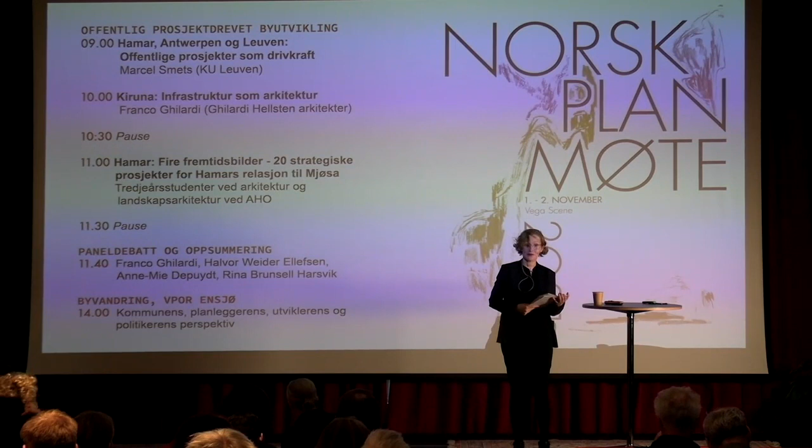I'll take this in English. We are so lucky to have Marcel Smets here. Marcel was the chief developer of the widely published and highly praised transformation of the area around Leuven station in Belgium, and also the Antwerp station.

Smets is professor emeritus at the Catholic University of Leuven, and he is also a visiting professor at the University of Thessaloniki and at Harvard University. This fall, Smets has collaborated with the Institute of Urbanism and Landscape, discussing infrastructure and the urban project as an instrument of transforming the city, with the third-year students of Architecture and Landscape Architecture working on Hamar.

The students will present this work during the planning meeting later today in a short brief, and in an exhibition in Hamar at B-Lab, opening the 10th of December, where the lectures Smets has been involved with during the fall will also be exhibited.

So today we will talk about the urban project, where the project is used as an instrument or a means to transform the city without going outside its own limits. I would like to say welcome to Marcel. We are very happy to have you here. Marcel was here last week discussing projects with the students, and we're very happy to have him with us today. Thank you, Marcel.

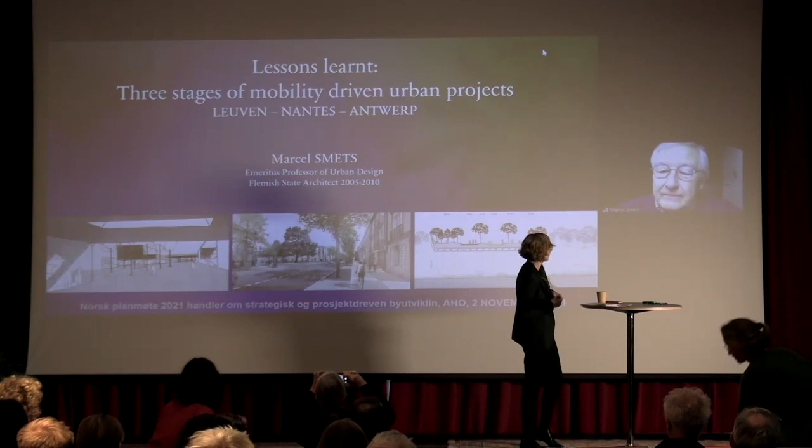Thank you very much. Can you hear me? Loud and clear. Okay, perfect. Thank you very much, Maria.

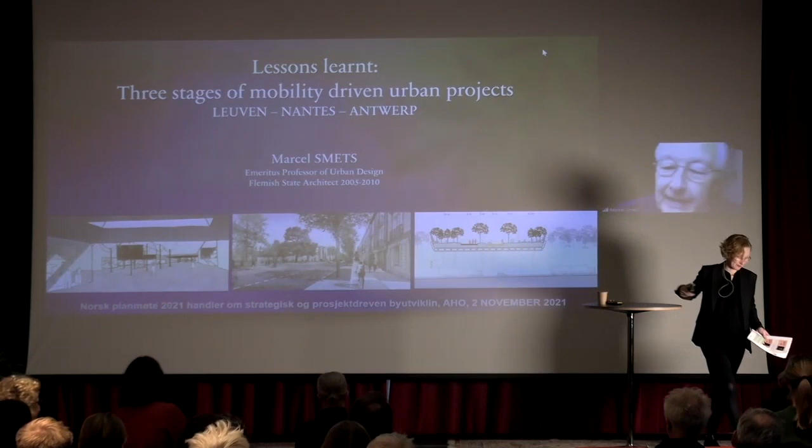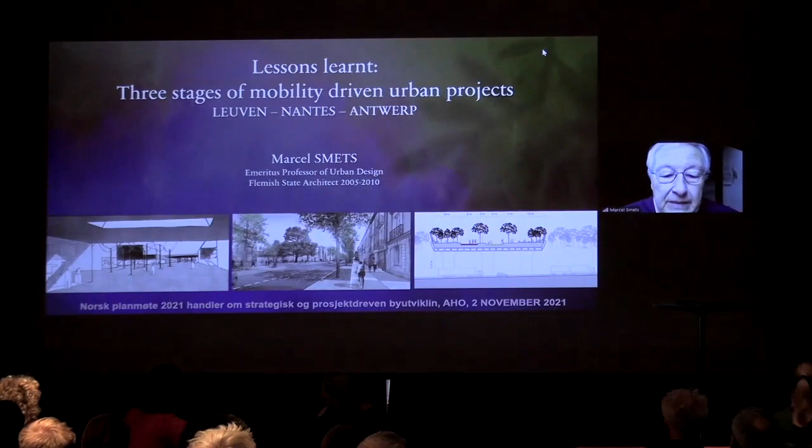Good morning, everybody. I'm very sorry not to be among you, but these means today allow a proximity which was not possible earlier. So I would like to entertain you this morning about three meaningful projects in my life.

They are meaningful not only because they actually cover the better part of my life. The Leuven project goes back to almost 30 years ago, the Nantes project like 10 years ago, and the Antwerp project, with which I want to end, is very recent.

It's 2020. So, they are not only meaningful because they give a sort of an image of what I've been trying to do in different associations designing and coaching these projects.

But I selected these three because they are not just projects. These three projects have all been, or are on the way of being, implemented. So I want to make a point for the feasibility of the urban project as a means of designing and directing infrastructural design.

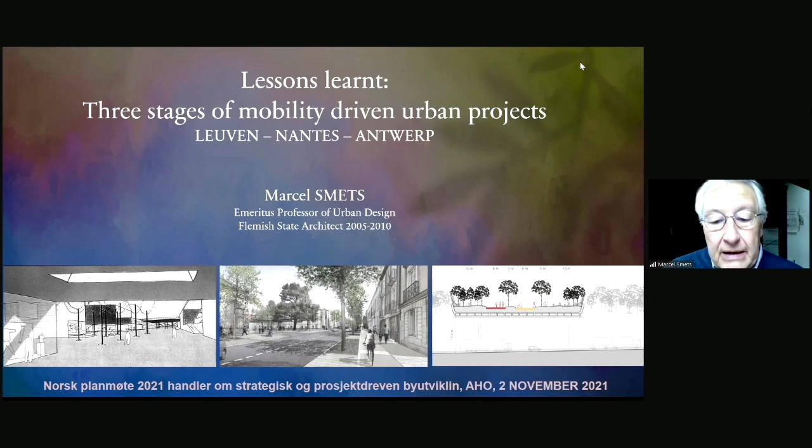So the intention of this lecture is to use these three successful case studies to investigate their recurring points of methodology, and state these points of methodology as a potential set of requirements and strategies to approach the urban project in general.

I would like to start now with what normally would be more or less the conclusions of a lecture, and put forward four steps or four conditions which, looking back at these three projects, I think are rather essential to have the success they were able to obtain.

The first requirement is that you would formulate a strong overall spatial concept that addresses both the general and the specific conditions of the site. It is not just generic, these concepts are specific, they are contextual. And not only contextual on a smaller scale, but also on the scale of the city itself.

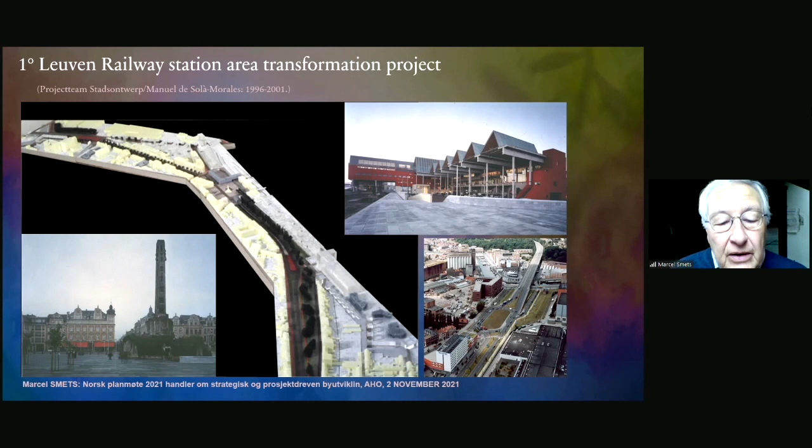Let's start with the Leuven project, which goes back to the period 96-2001, at least for the executive and implementation part. It deals with infrastructure, situated around the station of Leuven, which you see here on the model, and covers quite an area, reformulating the infrastructure in the proximity.

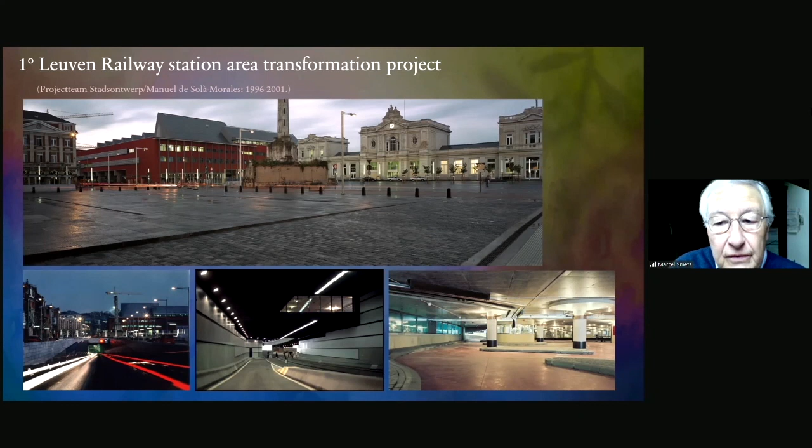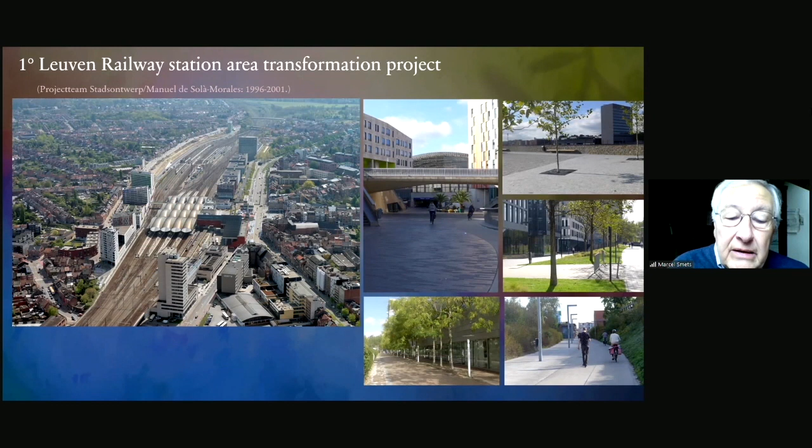It deals with the public space just as well as with hard infrastructural space, a tunnel, a parking, and so forth. This is a very recent aerial photograph where you see that the project, after 20 years, is more or less finished.

It started out with an analysis, which made clear that the line of the railway was like a tangent to the more or less circular city, and that in between the one and the other there was a large zone of city and infrastructural amenities, largely outworn and ready to be changed.

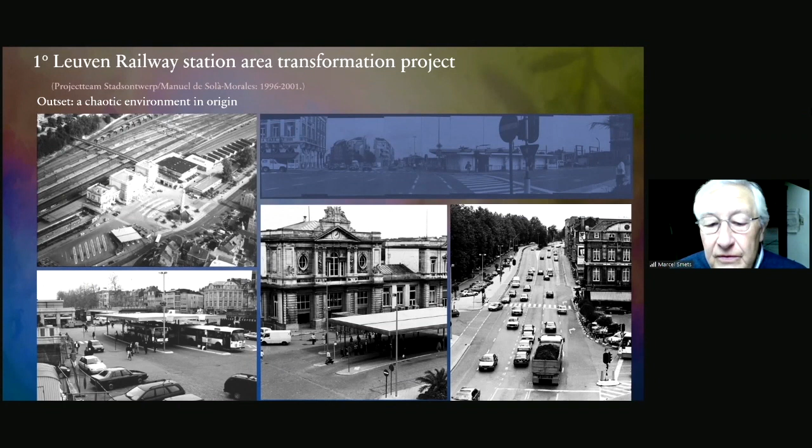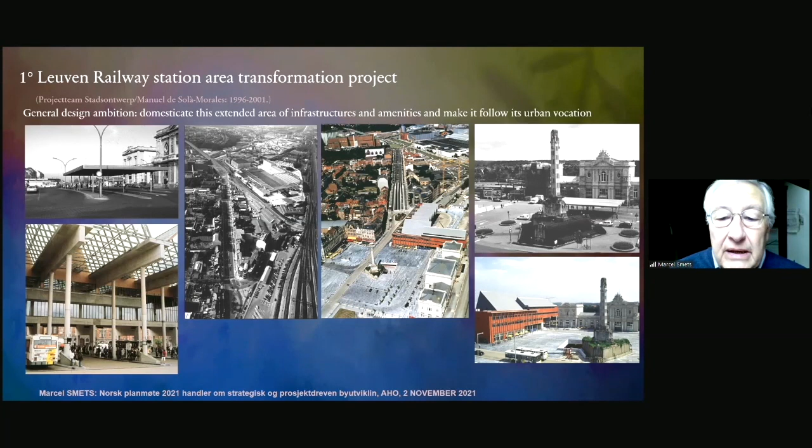So the general design ambition was to domesticate this extended area of infrastructure and make it follow its urban vocations. That's why I like to use these before and after pictures from the same angle, to see how much this project has actually changed the setting.

With relation to the spatial concept, there are a few major ideas. The first is to blend the transition between the center and the outskirts of the city by transforming the rail station into a hub of collective transport, liberated from the transiting car traffic.

It's an objective at the scale of the city region, where the line, in a hilly landscape, passes through the city and gives way to a place where the outskirts and the historic city touch each other. That's where we want to make the liaison.

To do that, we had to relieve this area from car traffic by directing the main flows around it. This was done by using the triangular traffic node that existed prior and condensing it into a real traffic plaza, which gave way to one road coming from the outskirts and passing along the station, liberating the zone separating the historic city from the railway station.

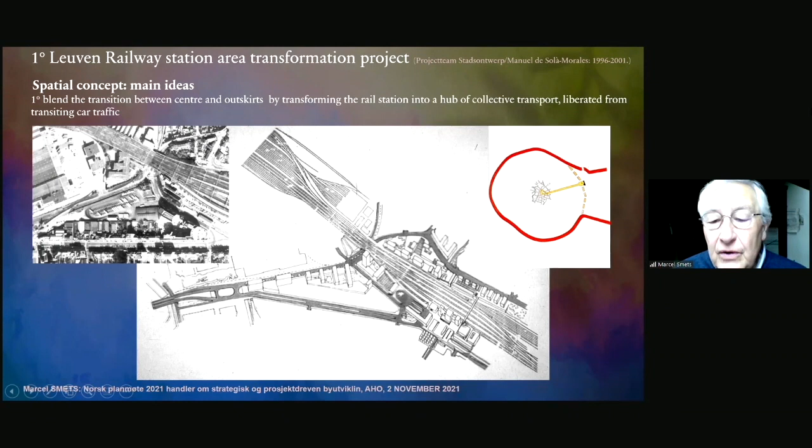That is the first element. The other element of the junction is the fact that you have to bring pedestrians and cyclists from one to the other. This is a main task, because it means we have to find a way of bringing people under the tracks and then back to the city, changing this passageway into a real urban street.

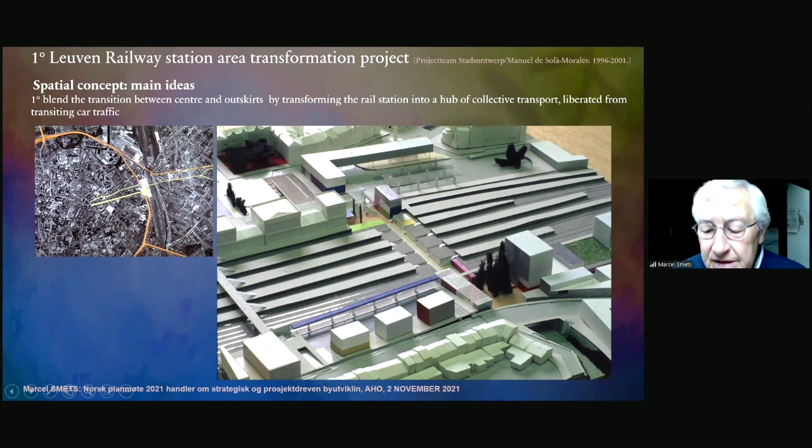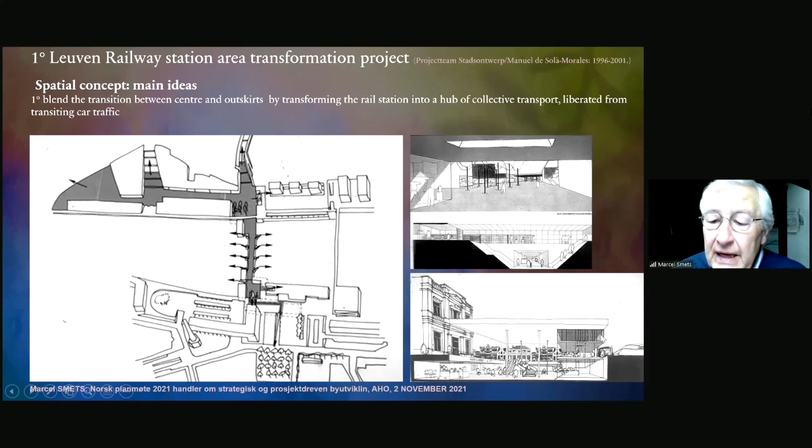An urban street which would, of course, need the necessary light - that was the idea of the original concept - the necessary ampleness, and the idea of introduction into the city.

The second main element of the concept was that there is an obvious linear directionality imposed by the tracks. Rather than denying it, the idea was to use it as a strengthening general concept, placing the major attractors of public activity on both ends of this linear development stretch, which would allow the intermediate space to develop relatively easily, since there would already be a passage from the station through the attractors.

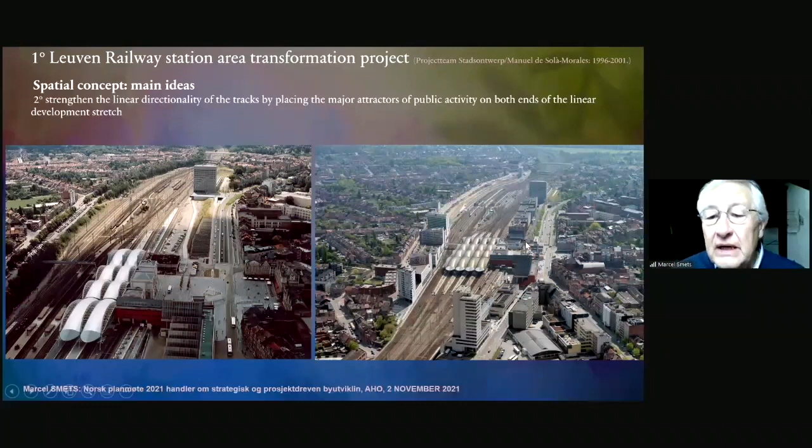As you see, these are two aerial photographs, one from 2002 I think, and one more recent. You can see that this idea of the attractors, which led to the filling afterwards, has been implemented.

The third important idea was to differentiate the particular character of the central city and the suburban urbanity, by creating a complementary opposition between the development on either side of the tracks. In this early model from 1994, 95...

...you can really see that we already foresaw a sort of park vis-a-vis the developed side here, on the old merchandise area of the railways. This opposition, but also this contact and complementarity, was of course not only important for the project as a whole, but for preserving the aspect of both city and suburb.

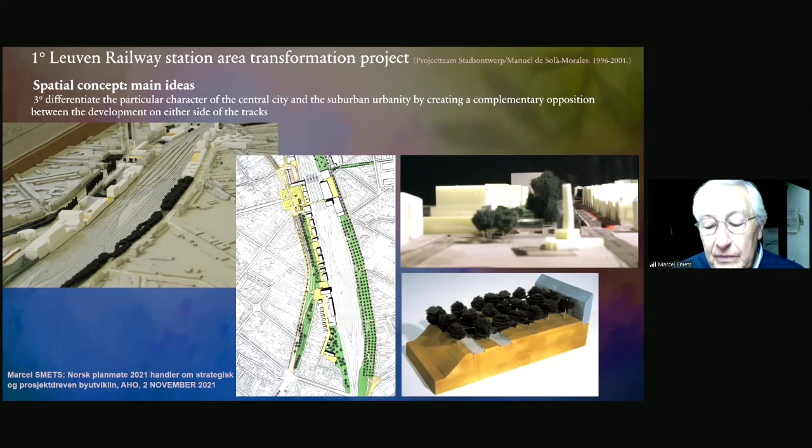And also here, we see that today we have this development, and we have been able to keep open the park, which I will come back to, has been realized in the meantime.

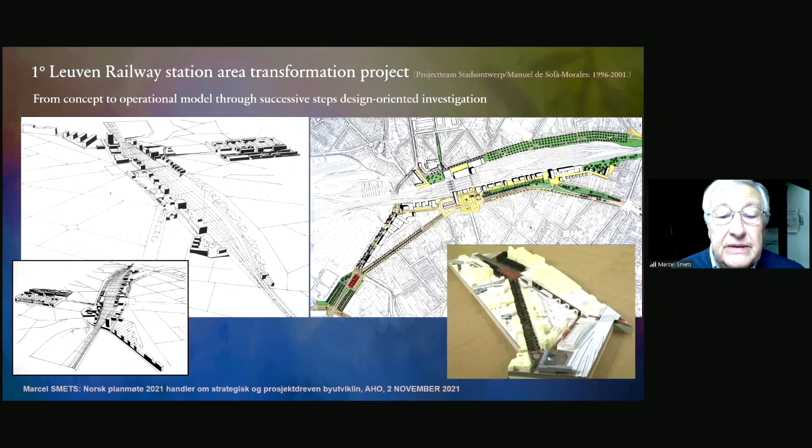From these original thoughts, we have to evolve to what I call an operational model through successive steps of design-oriented investigation, research by design, some call it. The idea is, of course, to test, and by testing, always make a step further from one project to the other, and get to a closer definition and a closer acceptance by all parties. And then, of course, there is this whole idea of securing the agreement of the major stakeholders by making them part of the design process.

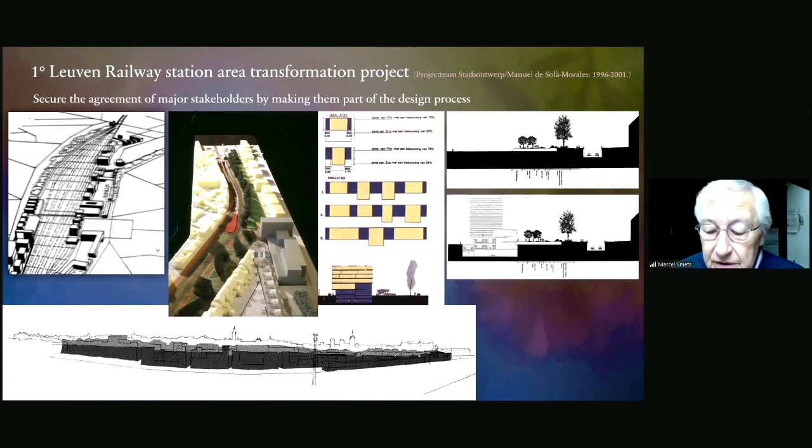I don't have time to go into it, but this project would have never been possible if we had not met, over a period of 2 years, every month with the high chief officials of the railways, of the city, of the Ministry of Public Works, of the bus company, each time proposing new schemes, new models, trying to test how they were reacting, reworking it, and so on, in order to finally arrive not at a definite plan, but at a framework which still left the possibilities of interpretation and change of program as time went along. 20 years is a very long time for execution of an urban project, and one can never foresee at the beginning what will happen.

Now, all of these at the time, we were either directly connected to the implementation, or we were able to monitor it very closely through friends and other architects. For instance, this whole idea of the transformation of the infrastructure - actually the team of the university I was directing at the time got a direct commission, in association with TVK, which was the engineering office, to actually implement it.

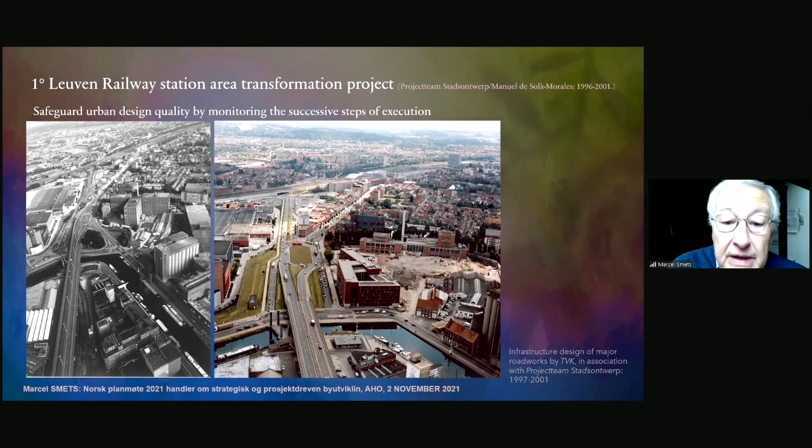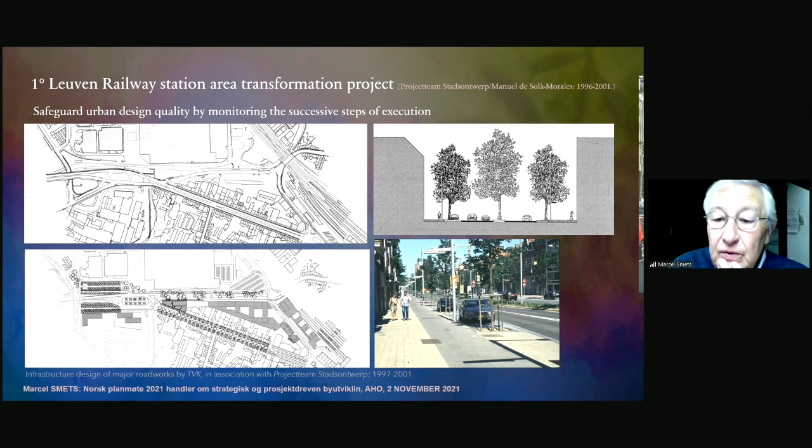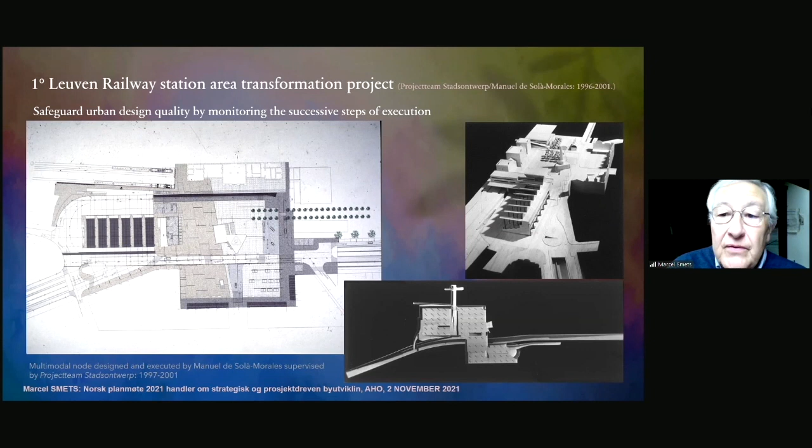And so this whole reworking of the sections, of the plantations, of the lighting, we actually did ourselves. And then, of course, there was this fantastic situation whereby I was able to ask Manuel de Sola Morales to collaborate with us - he being the executive architect, I the overlooking urbanist - whereby the project itself for the multimodal hub was actually designed by him.

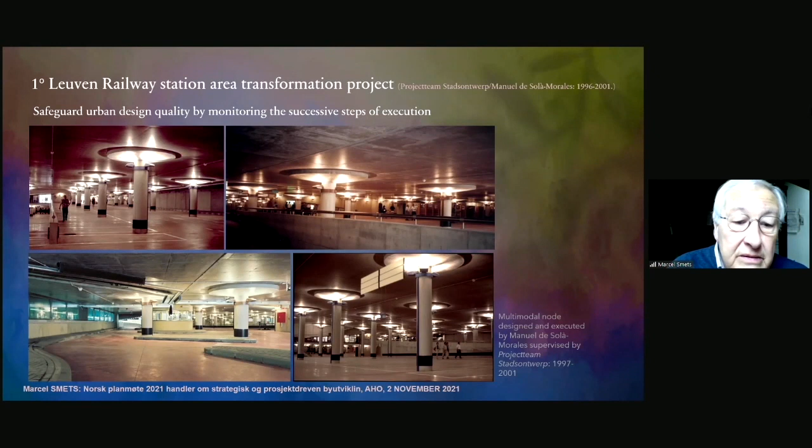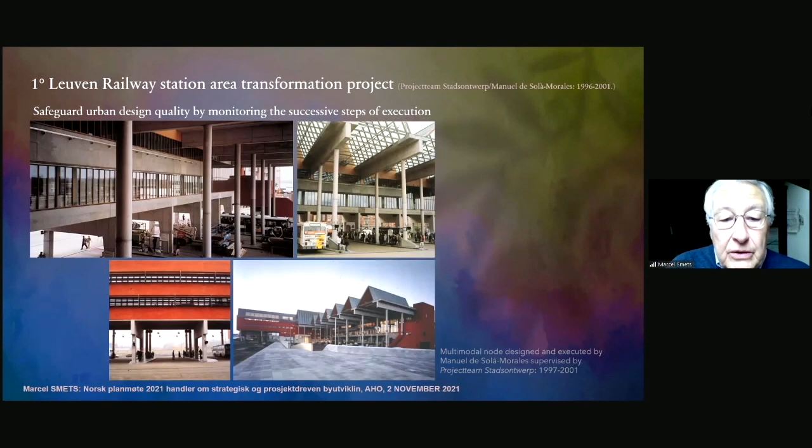It would take us too far to go into this description, but I hope the photographs speak for themselves. What I want to accentuate here is the fact that this would never have been able to happen if we had not had a direct line with the client, the public client at the time, which was the city, the 4 public partners who were actually paying for the project. So this part of the multimodal hub, for those who don't know the project, has many sides and many aspects, and is extremely well designed in its complexity.

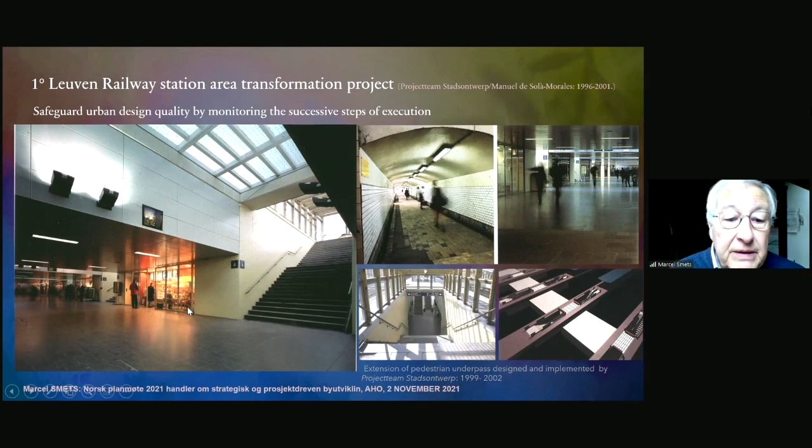There were parts that were more or less forgotten in the agreement we made between parties, and one of them was this underpassage under the tracks, which was essential though for the project. The railway company had its own engineering office, and they insisted that they would do this. Well, happily, they had a very inexperienced young engineer on it who was only too keen that we would be of assistance. And through that, we were able to more or less design, as a sort of second-hand help, the change of what you see - a very, very narrow underpass - into what I think has become a rather successful street.

I want to finish with two examples showing how important it is to keep on with this kind of monitoring in the long term. One is an example where this was not the case.

I left the project myself in 2002. The city sort of took over, with some of my earlier collaborators serving as advisors.

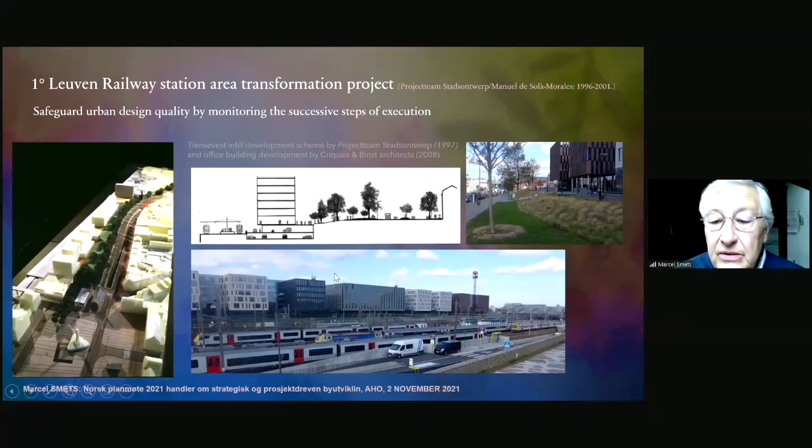I'm not so happy with the way this infill was realized. It was much too dense compared to what we had foreseen. There was absolutely not enough transparency. It became much more of a wall between the city and the site. So this is where we lost the battle of not monitoring.

The other side, however, is extremely successful in my opinion, by some coincidence. I was Flemish state architect when the new competition was launched, and I was able to contribute to having a very nice design selected by H+N+S and Archineering.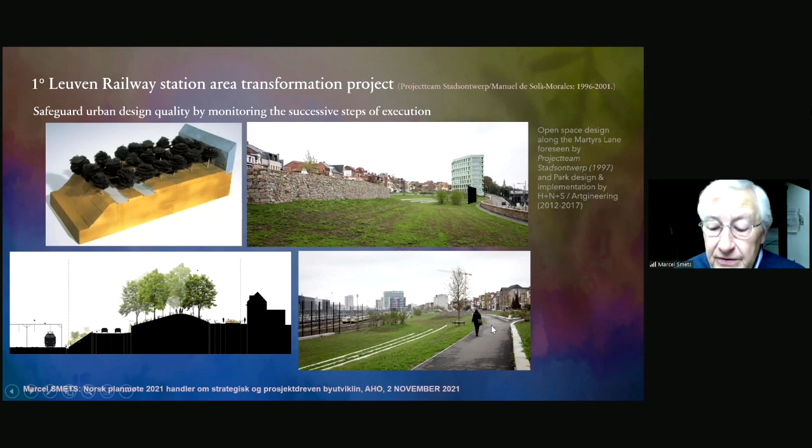I think the project they made was better than the one we originally foresaw, a parkway, which you see on the left at the top. Underneath, you see the new section where the road was actually dug in, which created this elevation whereby the passing road is practically absent, and the tracks themselves become part of the overruling landscape.

So that's for the Leuven project. The second one, the Ile de Nantes—it's a nice coincidence that Annemie explained the whole project yesterday, so I don't want to go back into it, just resume with an infrastructure plan, improved accessibility, and the development that came as part of it.

On the right you already see a picture of this new chronobus, bus line number 5, C5, now running in Nantes in an east-west direction, which has also allowed the transformation of one of the main east-west axes with the creation of a lot of public areas.

In general, the whole idea of the Ile de Nantes has to do with the transformation of an initial industrial land that was basically determined by a north-south transit into what was called a metacentre, which really extended the original centre-ville, the center of the town.

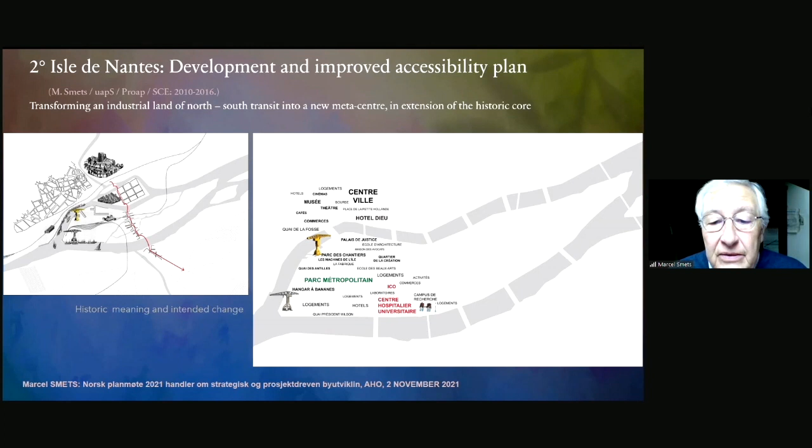This would combine many new facilities, activities, and large institutions, which needed a great sense of centrality without killing the central city, because they stayed complementary.

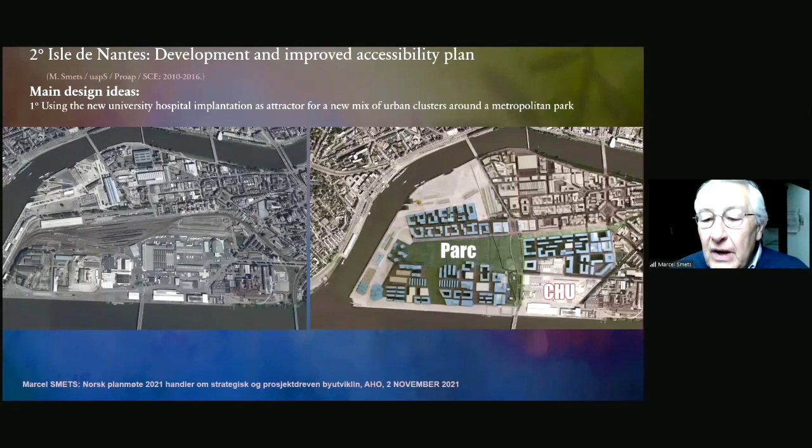There were a few main design ideas, one of the first being using the new university hospital as an attractor for a new urban mix of urban clusters around the metropolitan park. This introduction of two large new elements mobilized both a number of activities—the university center—and open air attributions.

This is very essential. The other idea is that the north-south throughways, which divided up the island, would be changed by inserting them into a grid of local main roads instead of throughways, for service and distribution—adding the east-west connection and lowering the intensity and capacity of the whole thing.

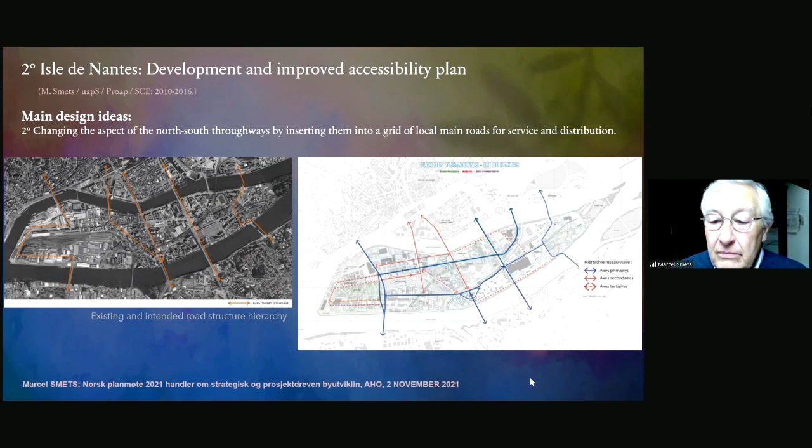With regard to that, an important element I want to stress is this new junction, the introduction of a new passage between the two existing bridges.

The view we proposed with Annemie was to have a parkway connecting it, an assemblage of new functions as one element, but also marking two different atmospheres, two different urban landscapes: one, the more built landscape of the metacentre and the hospital, and the other, the open park landscape with buildings in it, at the point of the island in the Finistere.

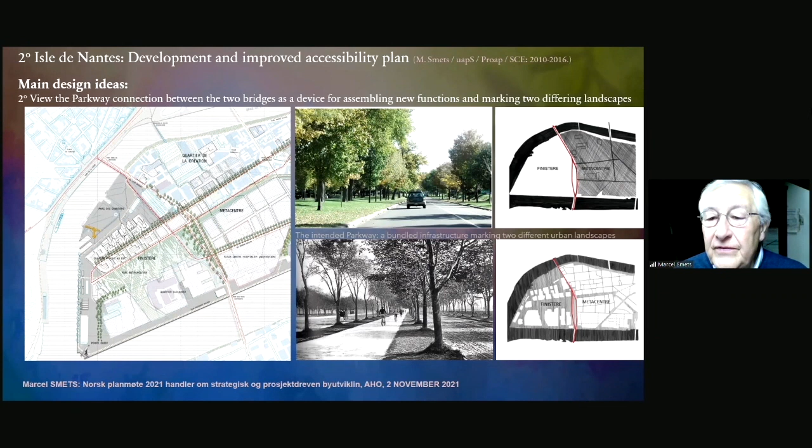In order to realize this metacentre and this new urban ambience, you can only get to this kind of centrality if you realize accessibility from the whole region. And if it's not to be by car, it needed a great impetus in public transport.

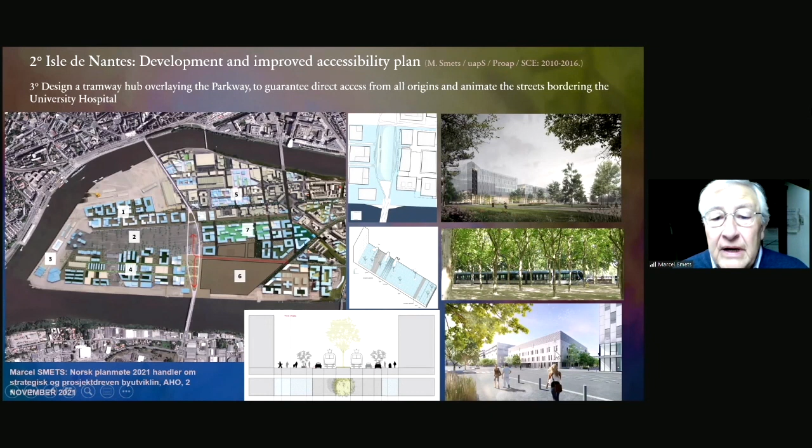I'm showing these designs that UAPS has worked on most of the time, to show this idea of a plaza, an open air plaza in front of the hospital, which you see on the top right, and also the section of the new road along the hospital, which because of the new tramway had to breathe another atmosphere that had to be decided and worked out.

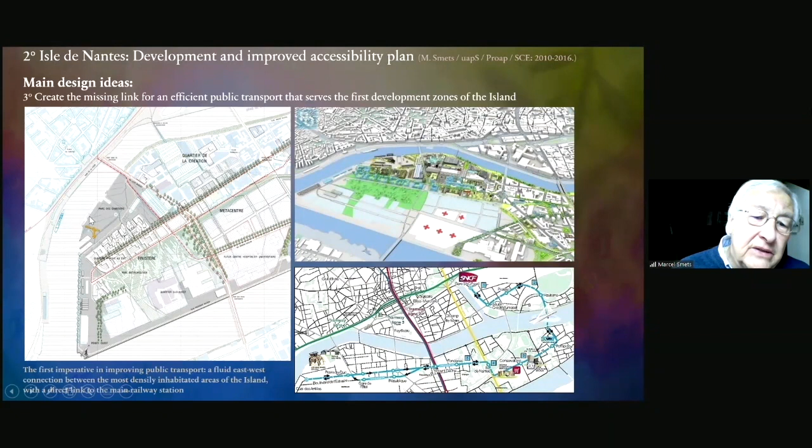Now because the building of the hospital and all that takes years and years, the first priority of course went to giving access and improving accessibility by public transport of those areas which were already built, basically in the north of the island. As you see in the Plan de Transformation, this quartier de Prairie-au-Duc has 3,000 inhabitants.

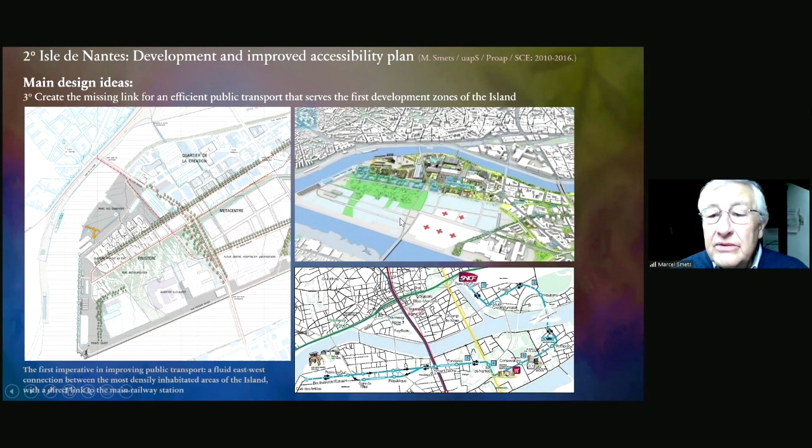I'm including a plan which we didn't draw, just a plan of the Ligne 5 as it exists today, to show how this line links all these subsequent elements to the station, and also realizes an east-west possibility by taking this super fast bus line.

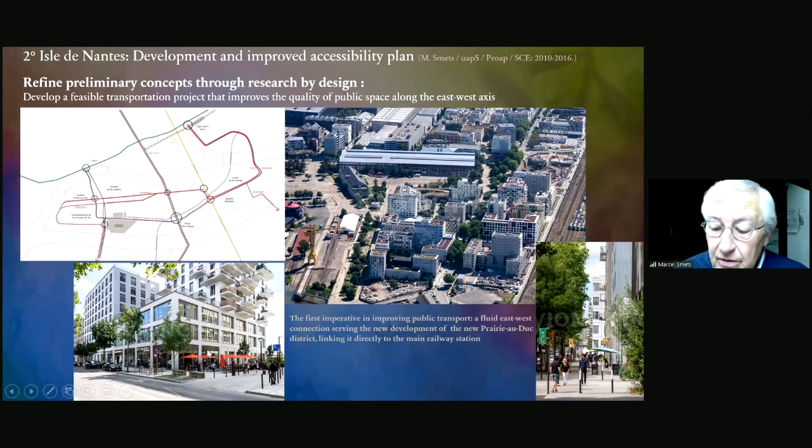Then, in the middle, this axis is actually the bus road, but it's not only the free bus road, it's really the central spine of the new area, with a number of corner shops and so forth, offices, etc.

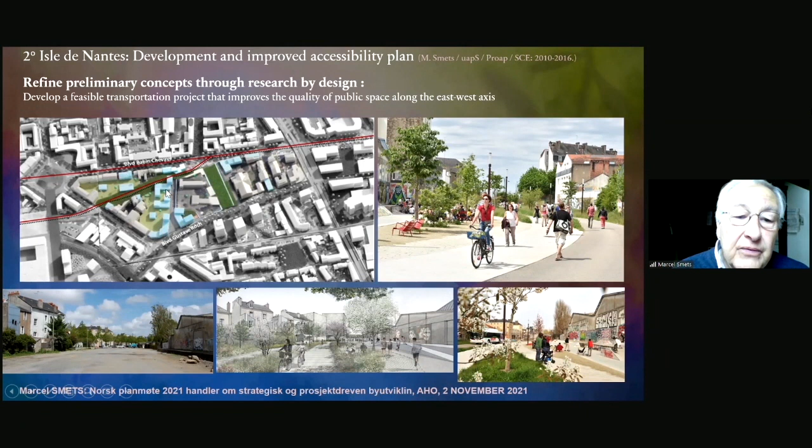A little further, in the existing area, which is really the older, somewhat poorer area that's still there, what we were able to benefit from is this kind of derelict space that existed because the train was also ancient, going through them. Instead of just filling it, the idea was to keep it, use it both for the bus and for the bikes, and as a sort of very rudimentary public space, which with very little means would at least start the transformation of this poorer area. The blue volumes are all part of proposed transformations in this area.

And finally, maybe the more important one is this so-called Boulevard Vincent Gache, where the very great specificity was the existence of this sort of 20 meters wide former railway emplacement, which was only used for wild parking at the time, even though there had already been quite some renovations, some new buildings at the time.

What we suggested together with ProAP and UAPS was the idea of using this 20 meters of wild parking as an initiation to create some kind of zone, let's call it a green corridor, planted, but not only planted, a real civic use, and use the necessity of having the bus line go through there to transform the whole transversal section. Again, this idea needed a lot of elaboration.

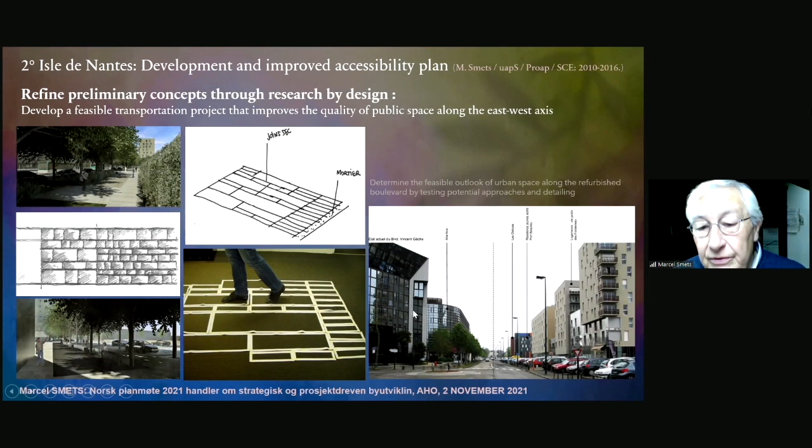It's not only a concept, it's how do you go from this concept, this original picture as you see, to the actual situation. It both enhances a view of the kind of landscape you want to incorporate, but also a view of the detailing that was originally foreseen by João Nunes, but then really worked out in detail later by Annemie and UAPS and her group, in order to come to a result which you basically see here.

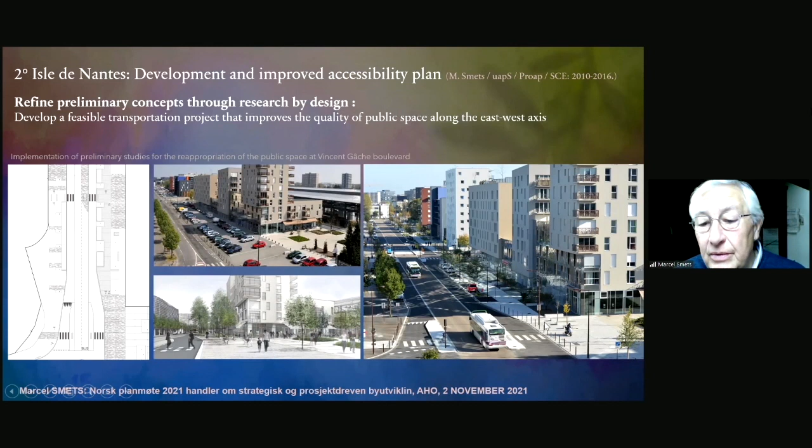As of a whole transformed section, whereby indeed these wild parking spaces were sacrificed in order to bring the possibility of a new public use and a new urban landscape, all thanks to these separate bus lanes in the middle that we needed in order to guarantee the accessibility.

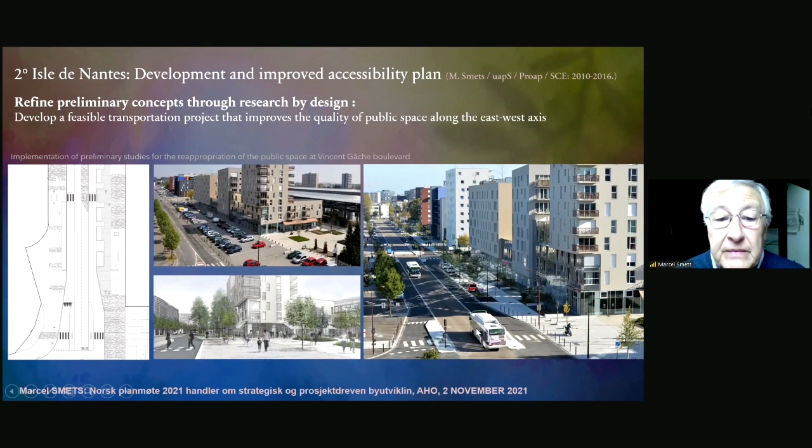Now, of course, this would not have been possible, as was already very highly stressed yesterday by Annemie, without reaching the mandatory agreement of all stakeholders through intensive processes of co-creation. I don't want to say more, but I cannot stress enough this necessity.

I'd like to end with this: the nice thing is, of course, that there is a magnificent reaction both of the citizens, but also of the market, in creating new developments in response to the reviewed accessibility and to the public space that is available there.

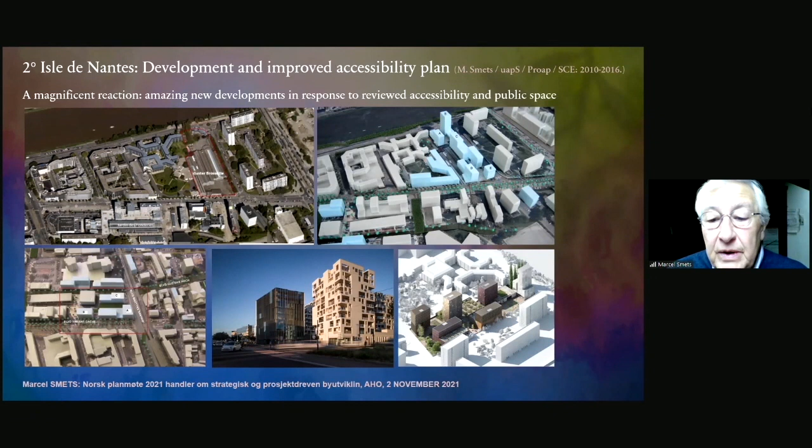Both of these areas have in the meantime been developed after plans for which we made the feasibility studies, and so forth. We have no time to go into it, but the nice thing is that, in my view, these reactions of the market, seeing new opportunities because of the improved accessibility and the enhanced quality of the public space, are rather exceptional.

Finally, the last project I'd like to go into is one I've been able to monitor within the group I'm actually working for quite often now, for Urbanism, which we undertook together with the Engineering Office of Tractebel and the Communication Office of Common Ground.

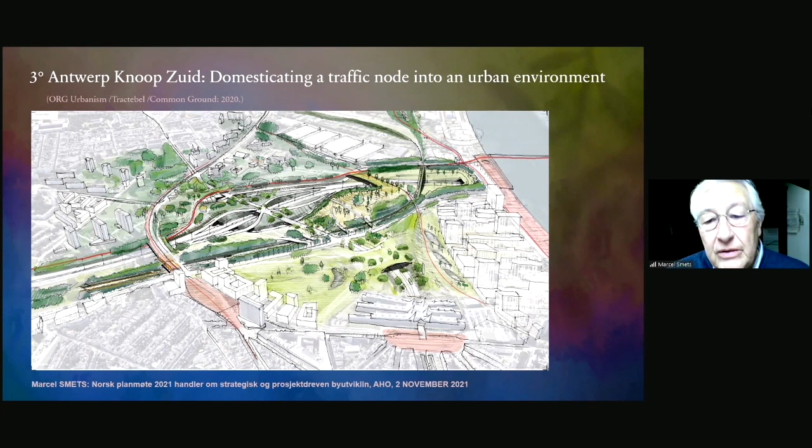Now this, in contrast to the two first projects, in a way looks like it's more an open project, more a landscape project, like it's not part of the city, and yet it very much is.

What we are dealing with is this enormous urban node at the south of Antwerp, part of the earlier motorway, which was conceived solely as a highway, a motorway network, motorway spaghetti and solutions, and all the problems that stem from them have to do with this attitude.

Because you see, not only the size—we are talking about 1 kilometer by 1.2 kilometers as a gap, an opening between the city center and its peripheral development—so it's a huge barrier. And at the same time, of course, it causes a lot of problems with relation to air pollution and so on.

So the city was not happy with it for years, and had been working on how to amend this situation: how can we fill in the edges of this open air area with different kinds of ideas and projects, and how can we re-establish certain links between the city and the outskirts, and on the other hand, how can we transform the capacity, the idea, the quality of this open space, and make it usable for the city instead of just being inaccessible?

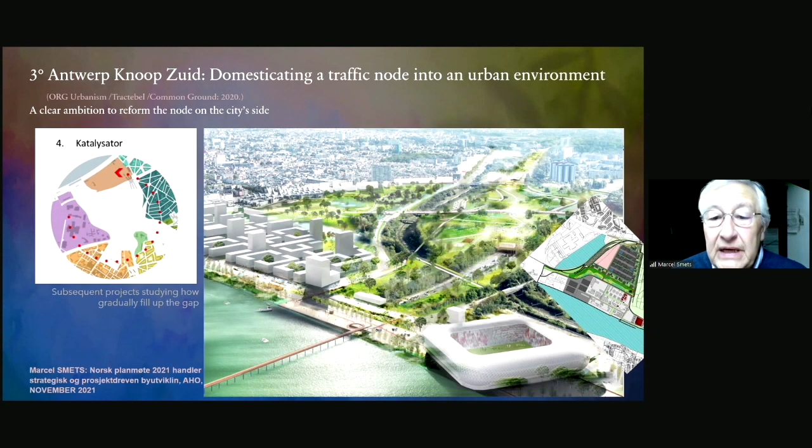And while doing that, can we also improve the accessibility? Because this need of creating the junction between the city center and the outskirts also made it possible that this Colonel Silvertop Avenue would become a very major link, because it was also passing the railway line going from Antwerp to Ghent and the eastern cities, and maybe we could develop a new station and a new mobility hub between the one and the other.

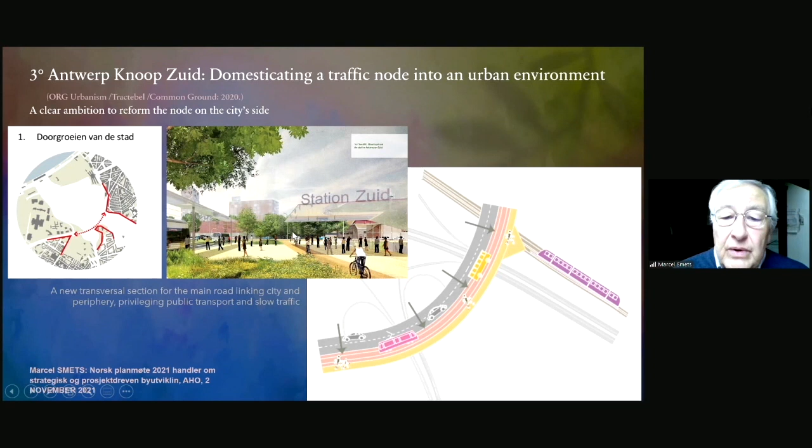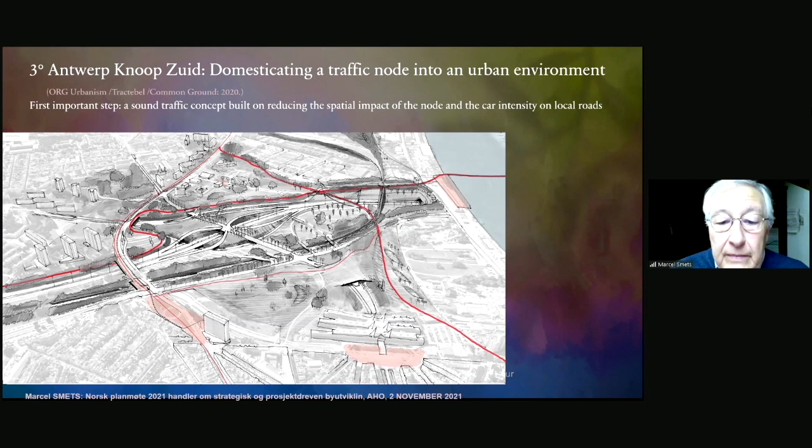There was not really a conviction that either one was to be implemented. So the first important step for us was to devise a sound traffic concept built on reducing the spatial impact of the node and the car intensity on local roads. Without this traffic concept, proving that this node could do what it was initially created for - be the intersection for heavy car traffic - it would have never been successful.

So we started, and I want to point your attention to the importance of these kinds of exercises, which were mainly done in conjunction with the engineering office. Basically, the idea is to make a sort of scheme of what you are actually arriving at. What you see is that we have the motorway in the middle, and then on the city side and also on the periphery side, we have three major roads bringing in traffic to that node.

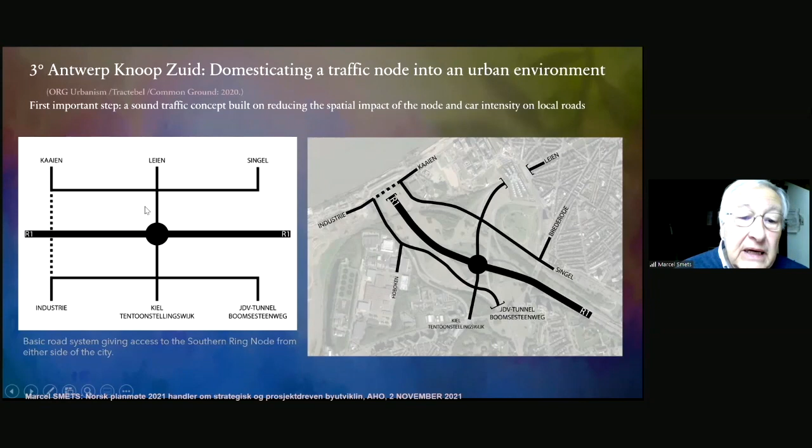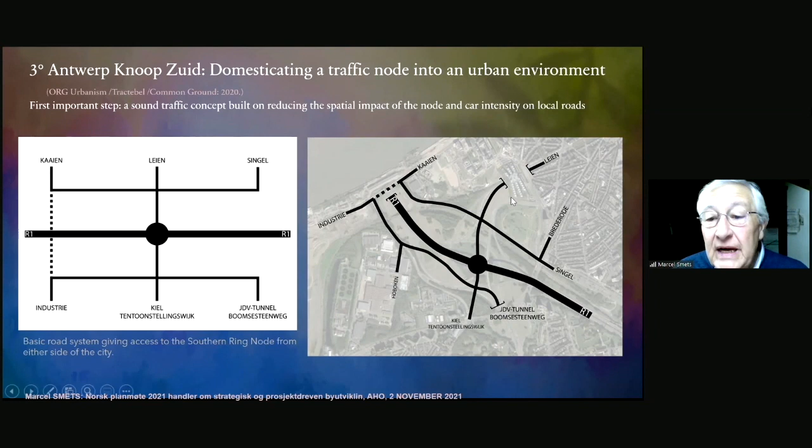So what we said to ourselves is we need to concentrate it into one traffic node, and then establish a situation whereby these two roads that are parallel with the motorway start acting as a sort of collector roads for the traffic that comes in from the three other major roads bringing the traffic in, and from these collector roads we then pass into the central junction, which allows us to reduce the traffic impact.

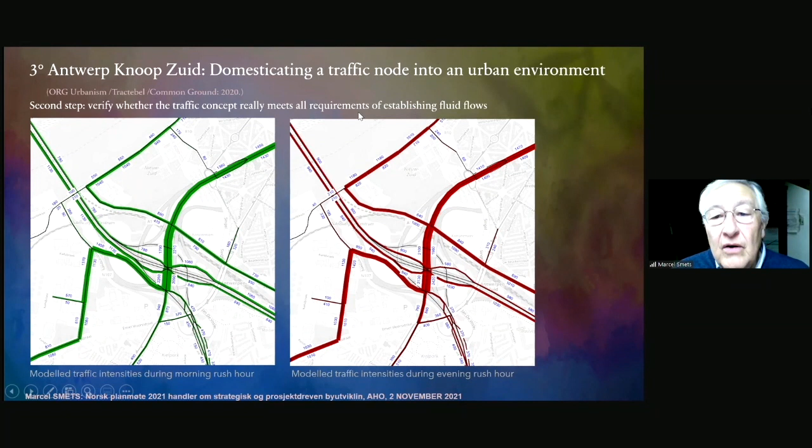So we proposed the scheme, but in order to first get the attention of the Ministry of Public Works that is paying for these implementations and revising the node, of course you need to prove that it works. So the second step was to verify whether the traffic concept really met all the requirements of establishing fluid flows. But not only the flows.

What is very important in this kind of node - and I showed you the element here in the little sketch - there are 7 important interchanges. And all of these interchanges, of course, work together one with the other, and so the idea is, how do you calibrate this kind of interchange in the right way? How do you create efficient and viable interchanges?

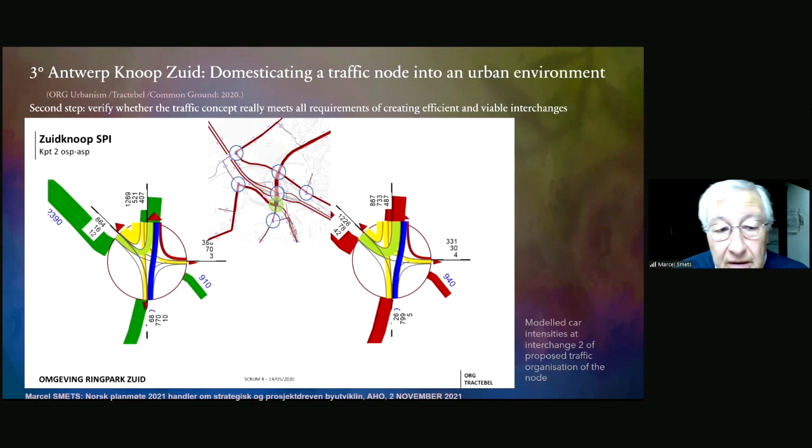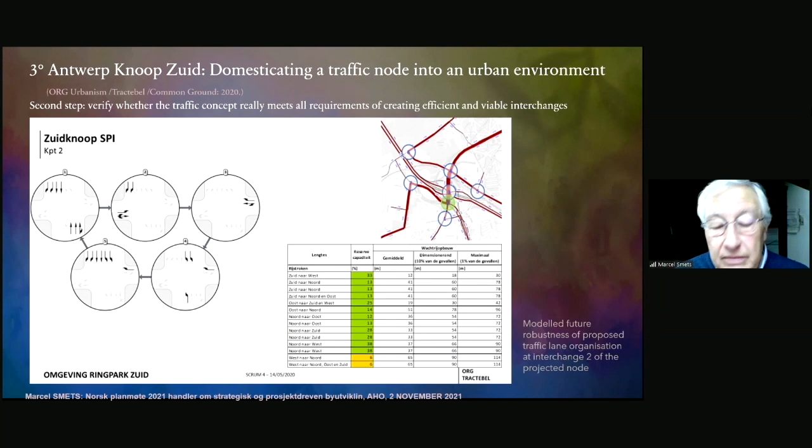First of all, by the flows that have to be taken care of, that determine the time of the green light and so forth, but that also determine the number of lanes that you need at each intersection. And not only today, but also something you have to consider is the sustainability of this element over time - where you see that the solutions you suggest are robust enough to accommodate coming growth into good measures. Now that is one thing.

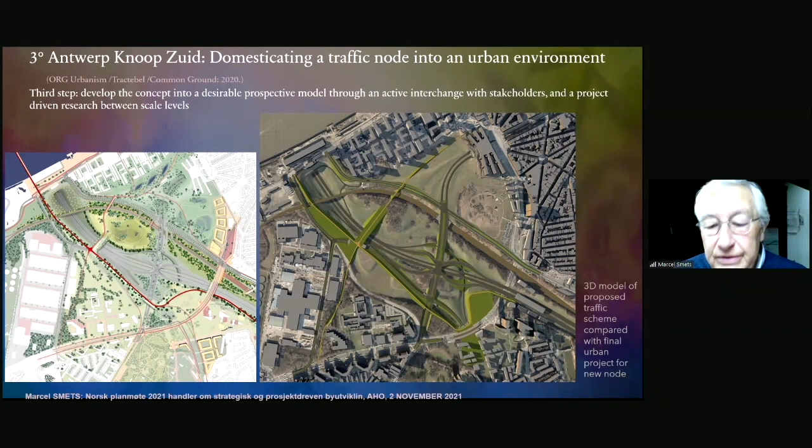That is, let's say this idea basically gives way to the picture on the right, whereby you see a sort of computer montage of the solution we basically suggested. But coming from that solution to actually the plan, which you see on the left - which is basically the final plan that has been accepted - is of course again taking both very intensive rounds of negotiation with the stakeholders, but also a very active process of design-driven research of both very small elements.

So the third step here is, how do you develop the concept into a desirable prospective model? And by both this interchange with the stakeholders and the design-driven research on different scale levels. So what I would like to...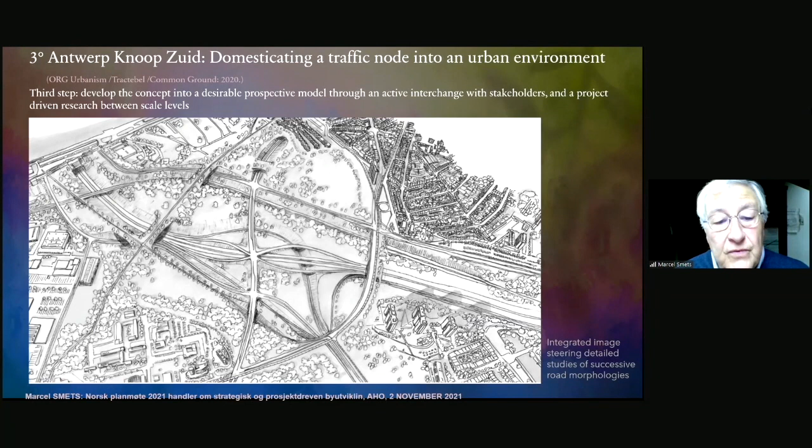Show you very quickly, because they are very essential, what you see actually in this kind of linking is this kind of prolongation of the inner city avenues with this central axis that both goes to the motorway and then continues to the periphery as the main element for cars - liberating in this way the other existing street for public transport and bicycles, and creating another direct bicycle and pedestrian route in order to even improve the connection between central city and outskirts.

This kind of new axis, this new important central axis - as you see, we even developed two models for that: one, the parkway, the other, the intermittent bossage. I show this because they are gearing specific design solutions which have to be worked out.

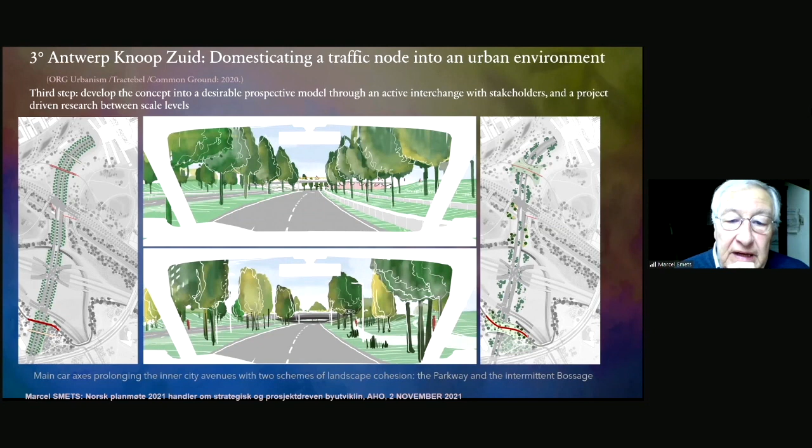Both in the left you see each time the solutions of the parkway and the bossage, and also the way this would be prospectively important, but also what is the impact of these solutions on the different major interchanges, because there are, of course, disruptions if you want to foresee a parkway. So how can you sustain the idea that these interchanges would not work as interruptions?

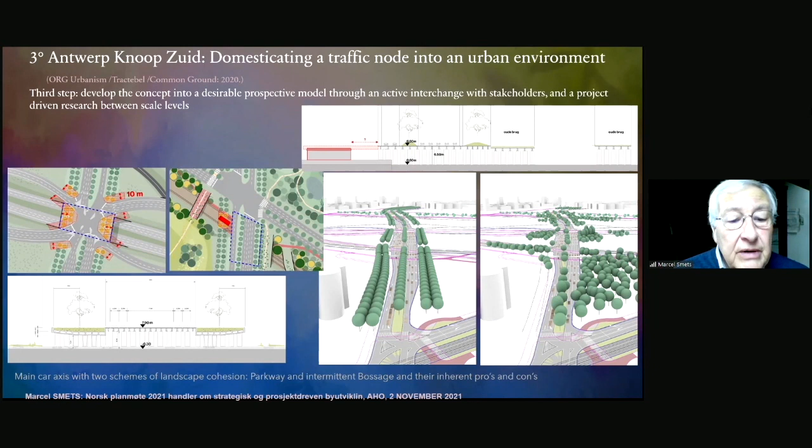And what is then the implication in terms of parts of the motorway which you would have to cover extra, and of course the costs that are involved in it, and so forth.

The second element is, if you have this central axis here that goes from the city center, then the other road becomes really spared, because there is much less or hardly any car traffic left. So we can start working on the way in which the very intensive public transport - you see the number of tram lines on top and the number of bus lines underneath - have to pass through this area.

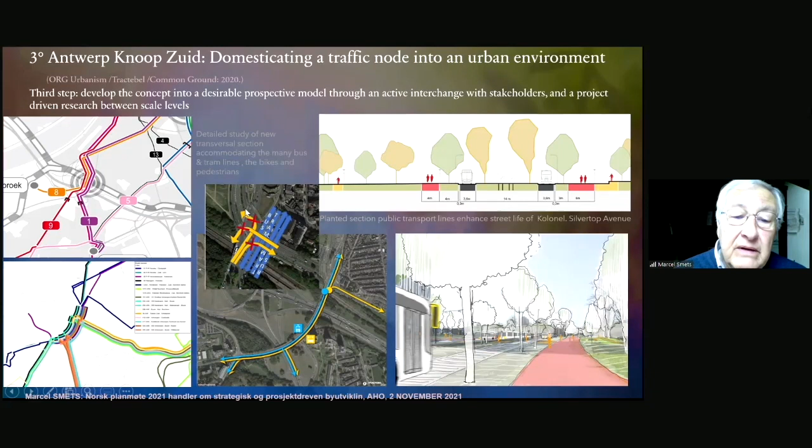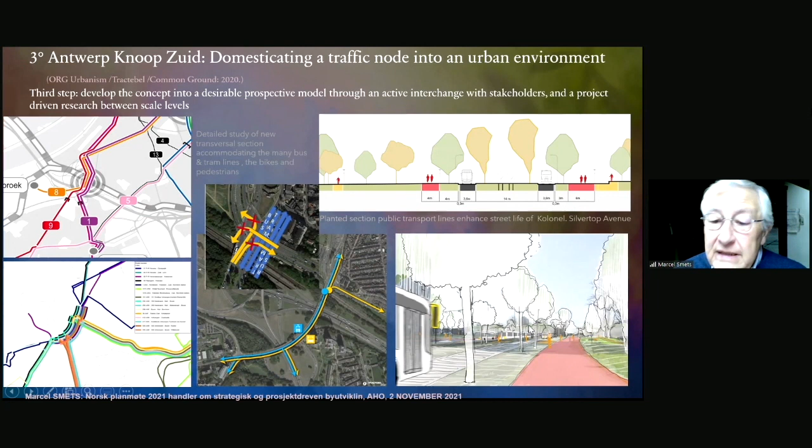And these important two lines really make it a major axis for public transport, even creating the fact that the interchanges for cars at certain points have to be organized in such a way that all these buses and trams have priority, particularly leading to a new kind of section which would allow a new landscape to be made out of this public transport axis.

At its passage with the existing rail station, you see that at this kind of passage, this is of course an indicated spot for creating a sort of new - not a central station, but a secondary station - which would allow a very swift interchange between tram, bus, bicycles, pedestrians, and trains.

Enhancing the possibility of course, creating more trains and completely changing the transport mode in the end, bringing many more people to the public transport.

So I want to end with just giving illustrations of how these elements impact the quality of the particular spaces, and how, by illustrating this impact, we were of course also able to convince the stakeholders as such.

So the first element I want to show is by moving up - because there is an existing road, you see it here - this kernel, the General Armstrong. All of these roads have military names, very strange, of course, because initially it was the bastions of the city. And by moving up this road towards the motorway, you create the possibility of a large area.

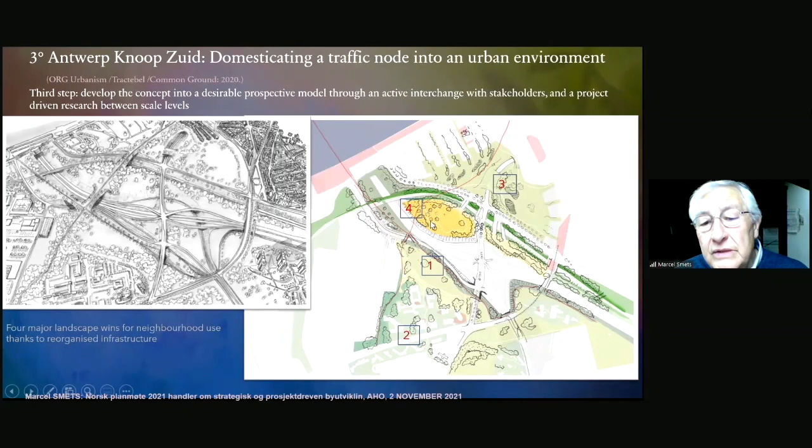And then finally, how do you use this new pedestrian road in order to liberate this kind of huge area, which is also one - this hortus conclusus, as I call it - and cover part of the railway.

So number one is the initial situation of this Armstrong Road and of the motorway you see here.

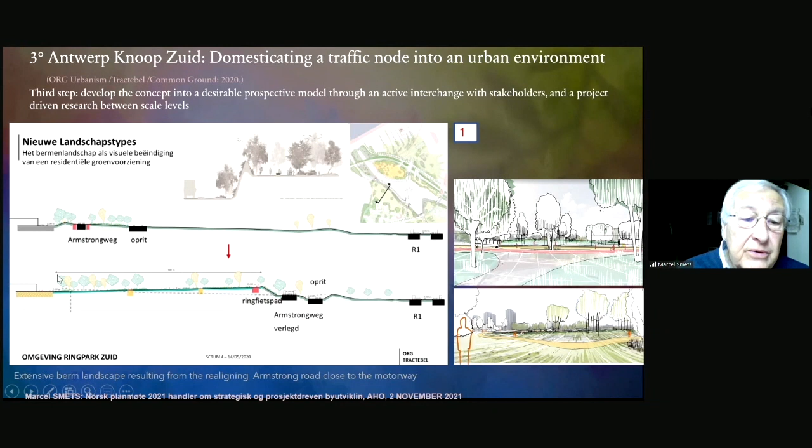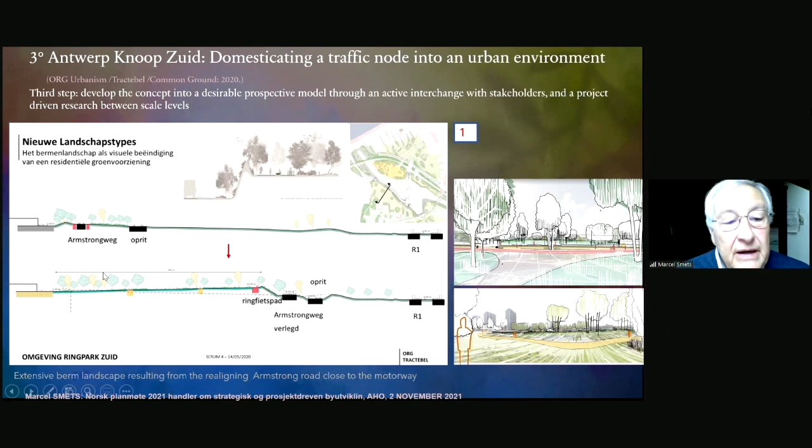If you move the Armstrong Road up there, you gain about more than 100 meters of surface, and you create a sort of low berm, which makes the motorway invisible and also takes away a lot of the noise. So you get this berm park, which greatly improves the living area of the neighboring sports parks and so forth.

The other is this road, the Emiel Vloorsstraat, which on one side has a 1960s modernist development, social housing basically, and schools and sports fields on the other side. The traffic doesn't really allow to go from one to the other.

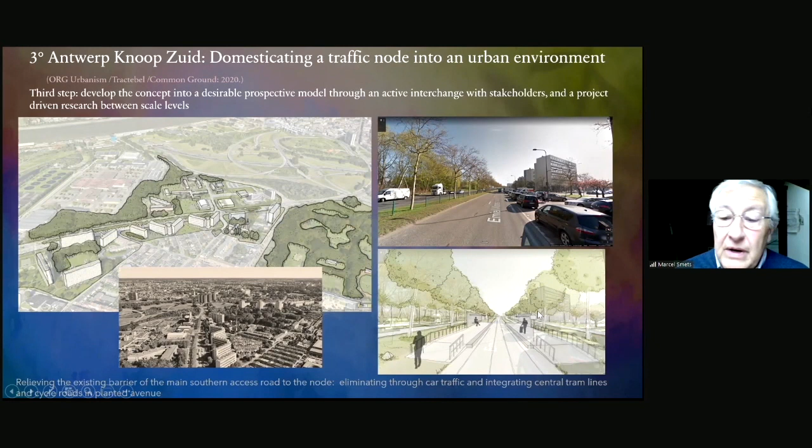The fact that we divert the traffic also allows us to change the actual section, which you see on top, into a new section, which you see down. The existing landscape, shown in the photograph top right, can be transformed into a new peaceful landscape, leaving room only for local roads and an important new tram line crossing the area.

The third element is what I told you about this armpit of the development in the south of the central city, where you have this existing spaghetti of roads, which completely covers and makes it impossible to use the actual site, by concentrating and bringing the four roads together into two roads.

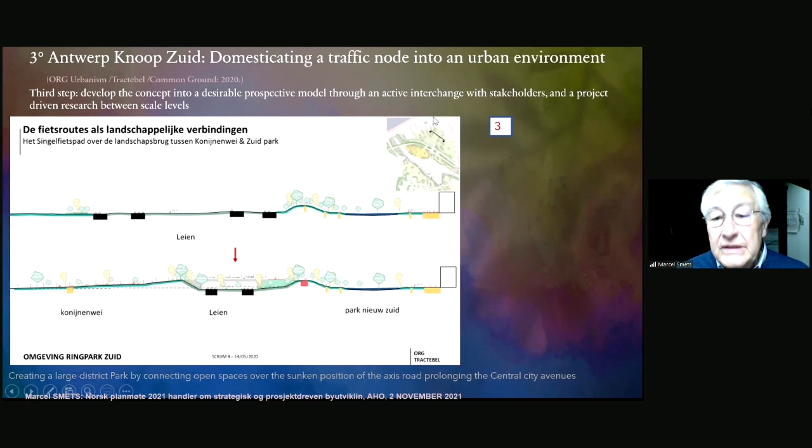We liberate a lot of land, but we also make it possible to cover these parts, at least in a large section, whereby one park and the other park are basically joined into a large area used for dwellings around it, the apartments around it.

And finally, this kind of new connection is quite important because it's just for pedestrians and cycles, offering a new connection through the park, which is highly different from the public transport road connection, but is also of course shortening the way for quite a number of people — rather essential.

Doing that on the way, it liberates or makes accessible this hortus conclusus, where the idea of an open-air exposition as an extension of Middelheim Park was foreseen.

And then of course we have to cover the motorway, and there are studies about what would be the impact of a 40-meter versus a 60-meter coverage — the costs, but also the sound and the potential for use and so forth.

That has been accepted. Now we are at the stage where this project, which had to be finished quite quickly, was completed in less than six months in 2020.

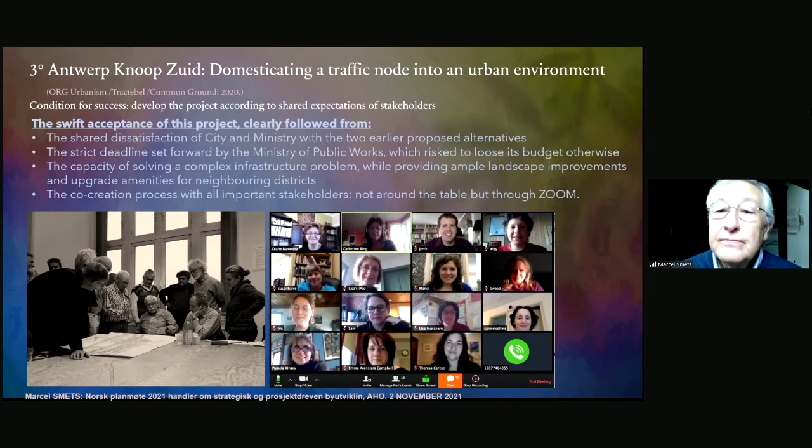Thank you, Marcel. It's been so nice to have you here in Oslo discussing infrastructure and architecture with you. Before going further with Franco Ghilardi, I would like to reflect on some of what we have been discussing, and thank you for bringing up infrastructure as public infrastructure, not only as a problem, but also as an opportunity of restructuring the city, and an opportunity of integrated design in the fabric of the city, as landscape and as architecture. From a Norwegian point of view, this is very needed and interesting to reflect on.

When you have been working on integrated infrastructure, dealing with scale, dealing with infrastructure as barrier, rescaling it into the urban tissue, working on the scale of the project, of the cross section, but also on an overall perspective of the city's organization, in the design team, the collaboration with the traffic engineers, but also with the public traffic authority—how has that been? How did you deal with that?

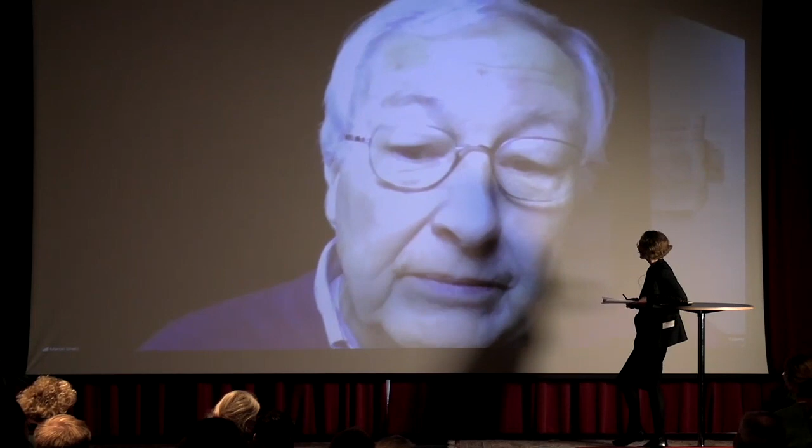Thank you. I'd also just comment on that—it's so nice to see how you both respect the functionality of the infrastructure, but also the perception across the infrastructure, so it's no longer perceived as a barrier, like the integrated design of Leuven. I always like how going from Leuven to Kessel-Lo you don't have the perception of that barrier anymore, creating this opportunity of a new centrality where before there was a barrier. I think in Norway, and also in the discussion in the studio together with you, this has been really nice to perceive.

Marcel was also in the scientific committee of Europan, and before we go further with Franco Ghilardi, who won the first Europan competition in Oslo I think, so there's this link between you—I think you know each other. But first, thank you, Marcel, it was really nice listening to you again, for giving me the floor.